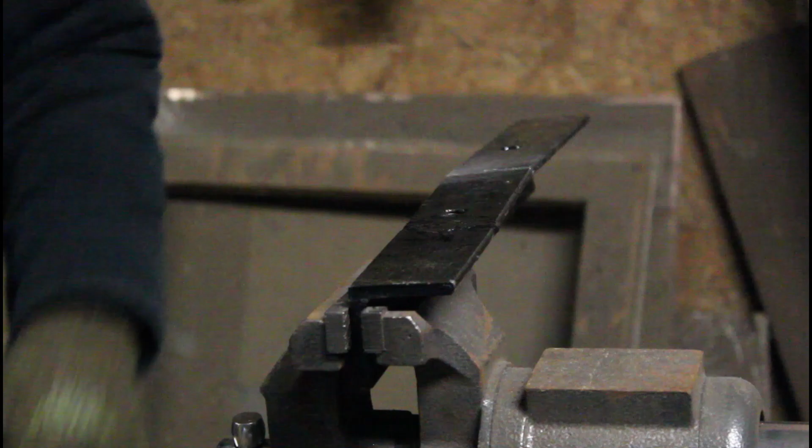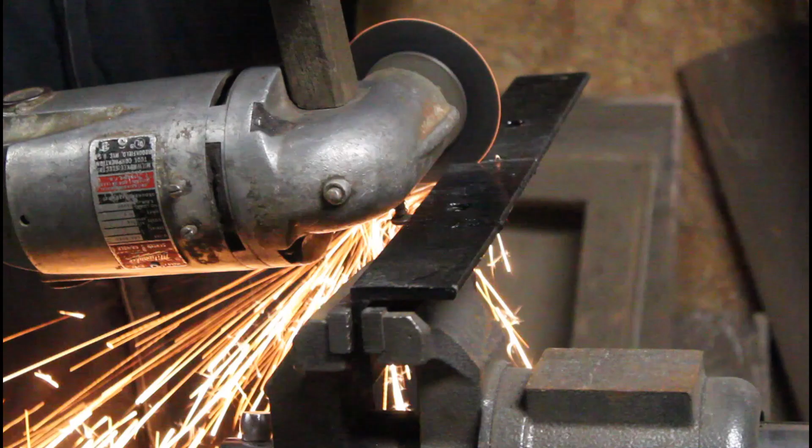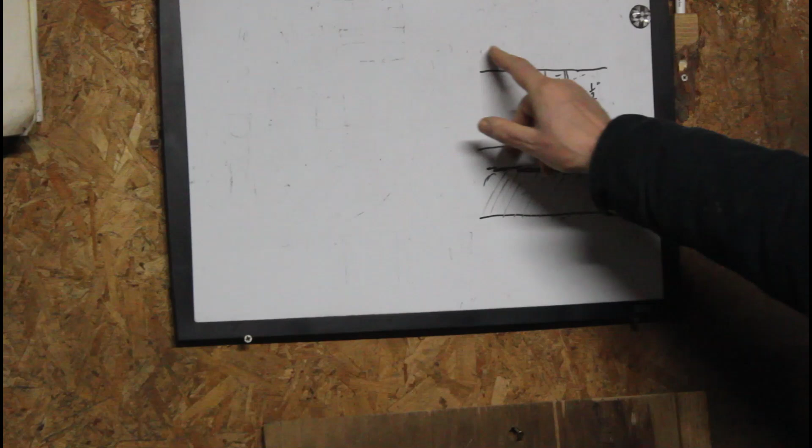There's a space between the bumper and this upper part of the bumper. This is the chrome part of the bumper, and this is the painted part. In between there are a couple pieces of steel - here's one, and here's another one.

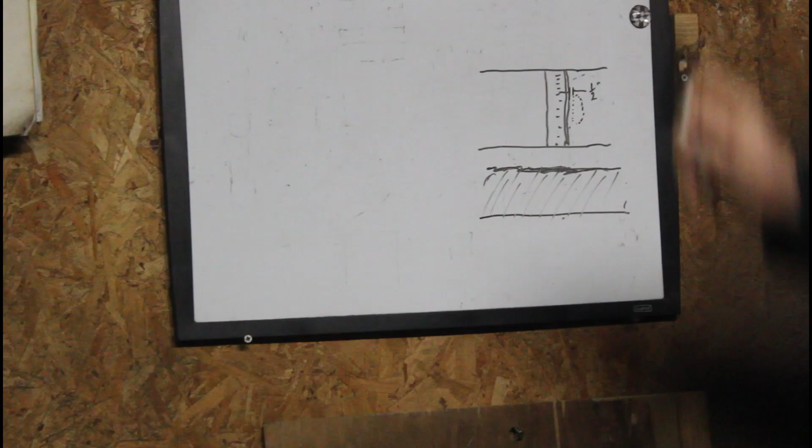There's some thickness to that, and some thickness to this one. Of course, they're probably in millimeters, but they're less than 1/4 of an inch, probably 3/16.

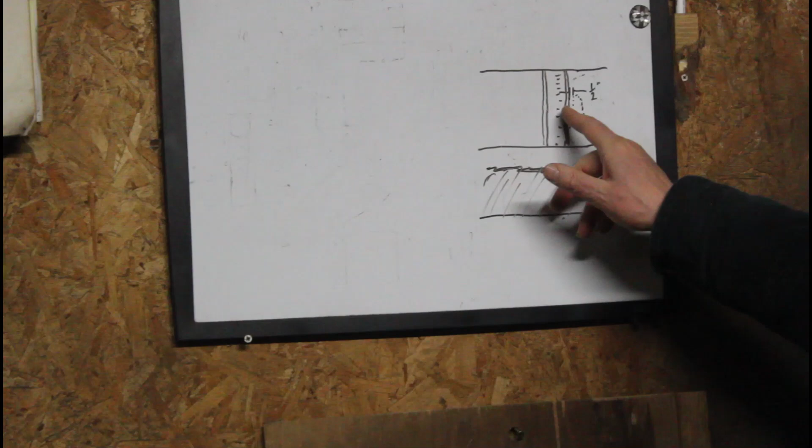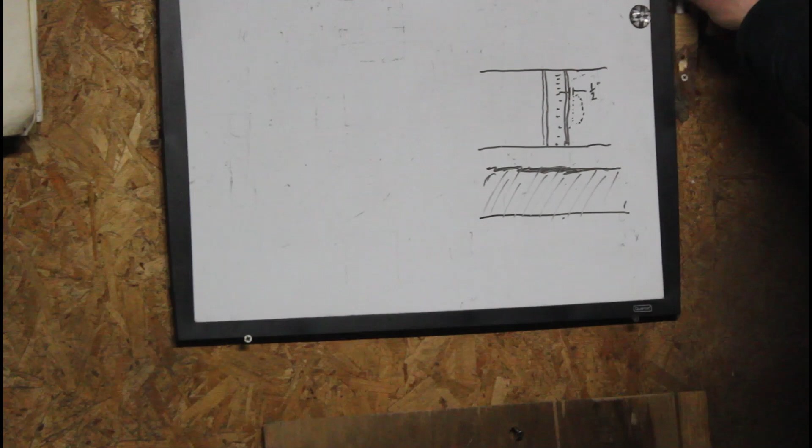In between here, back behind, between these two pieces right here, this one and this one, there's a hole, and I've indicated that with this dotted outline. That's about an inch in width from here to here. So if you would put the dimensions in, that's 1 inch.

And this one is 1/2 inch between the edge of this piece of steel and this hole, just the edge of it. So that's what we got to deal with.

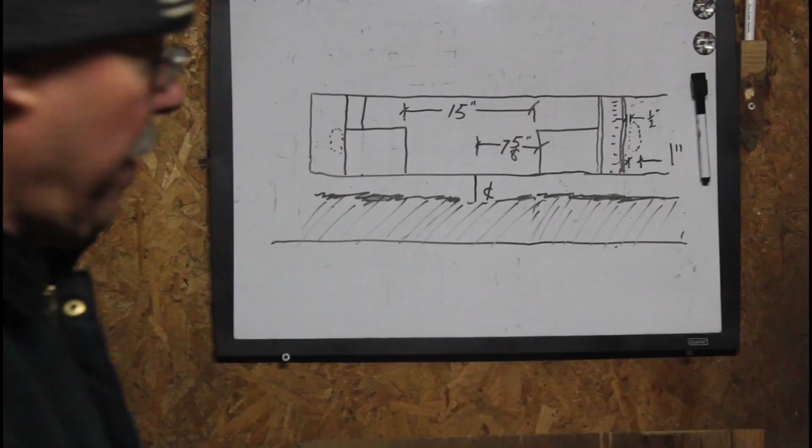Two pieces, one of which is right here, but one of these two pieces, this one goes on this side here. After I bolted it up, I measured between these two pieces and it's 15 inches.

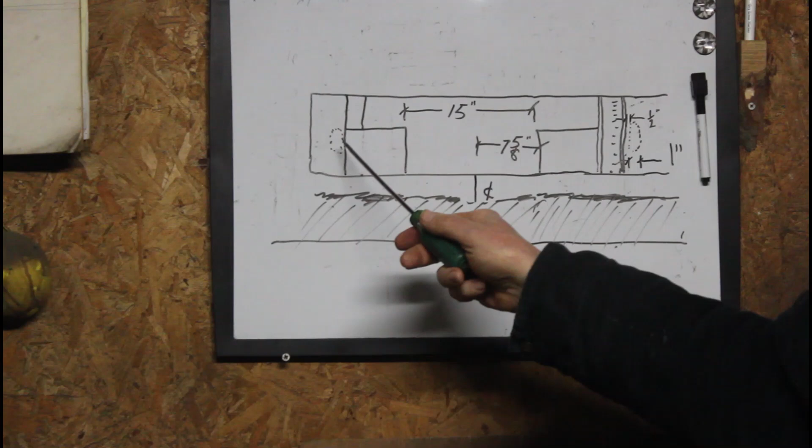Now on an 07 Dodge 1500, these holes right here, there's one here, one over here - they're about 20 some inches apart. But these pieces I already had, I measured between them, and it's 15 inches.

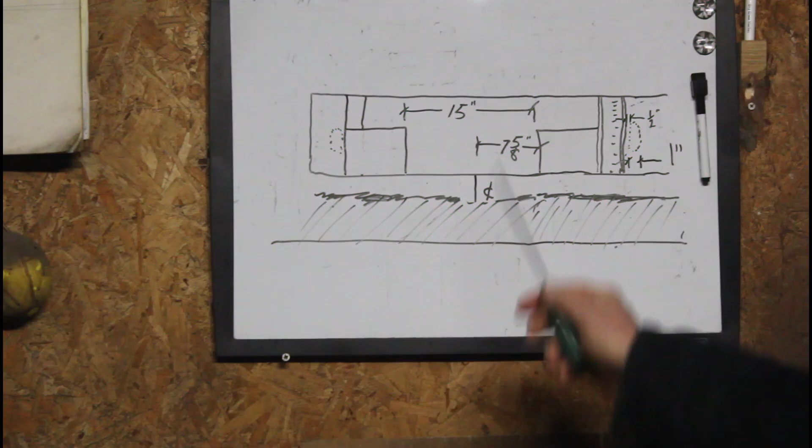And then I measured from this one to the center. I made a center mark on the bumper, and it's 7 5/8. So I plan to do this, and I'll show what I'm going to do.

This goes approximately like this. I got it against the level. So what I'm going to do here, since this is an unknown amount right here - how far this is either this way or this way - I don't know that.

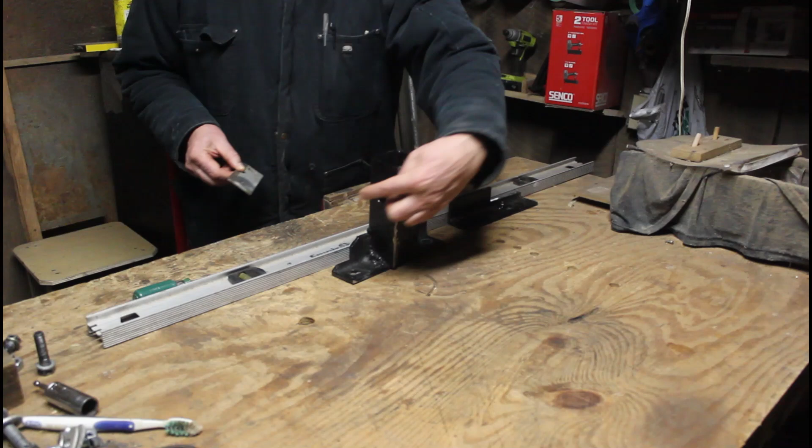So I'm going to make a plate like this in between here, and then it'll be adjustable. I'll weld it up solid, make marks on it, weld it up solid, and then put it back in there, into where it goes.

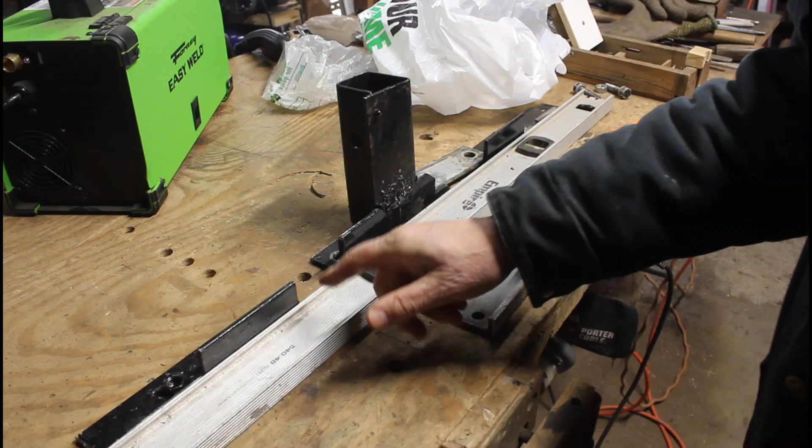Now I've made marks as to where I want the dimensions to be, and I've lined up everything with this level. This one here has to be slightly above where this alignment is here. And this one right here, I took a grinder and a burr, and I made this a little bit bigger right here. Then I made this a little bit bigger right here with the burr.

And then this one is going to go over here on this side, and this one over on this side here. So now I'm going to bolt everything up, and I'm going to use these bolts here. I'm going to try to use these. These are 1 inch by half an inch.

Sometimes you have to go back and make the bolt holes a little bit bigger, so I might have to do that. I have to make this on the back. It's about 21 degrees out here, so my hands are getting really cold.

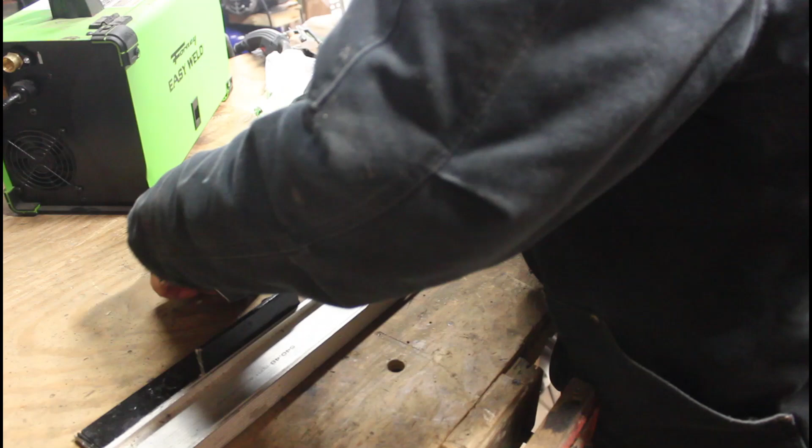Once I get this bolted up, then I'll take some measurements, make sure that it's okay. And then I'm going to have to refit it to the truck.

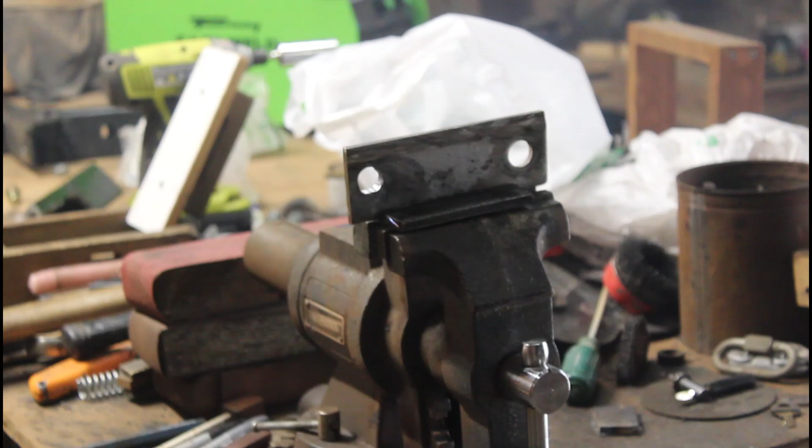Well, we got some welding to do right here to try to get this thing straightened out.

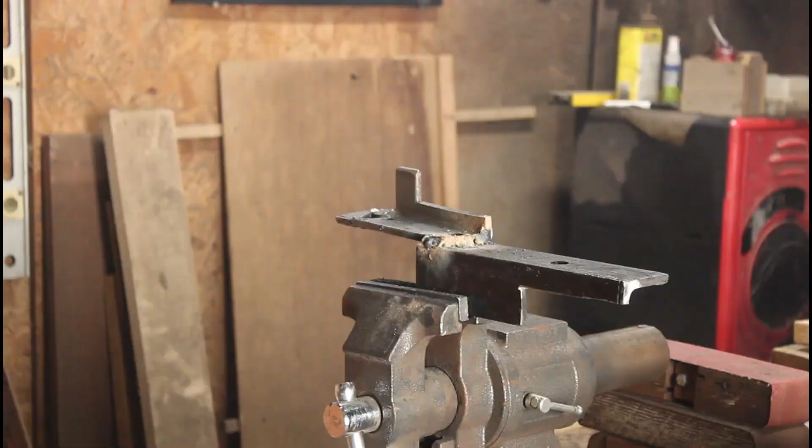Now I'm going to measure between these 2 points, and I'm going to have to make a bar that goes in back of this whole hitch.